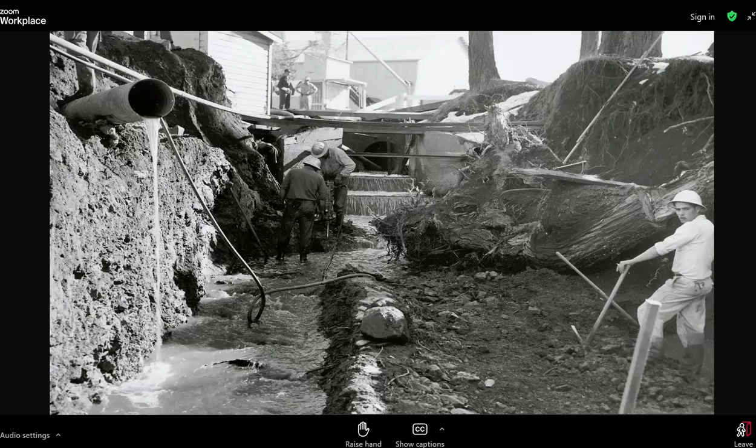Next slide. Okay, so just some previous board action. The district does recognize a multi-year operating budget process, which was adopted by the board back in 2000. And most recently, the board adopted the 2024 mid-cycle operating budget last December. It's the 23-24 mid-cycle, so it was the 24 budget. Previous action says March 2000, when the board adopted the 2-year process.

Yes. Okay, so this morning we'll be looking at our 2024 revised year-end projections. We'll take a look at our revenue and expense projections for 25 and 26. We'll review our debt service coverage, and we will follow up at the end with our 5-year forecast.

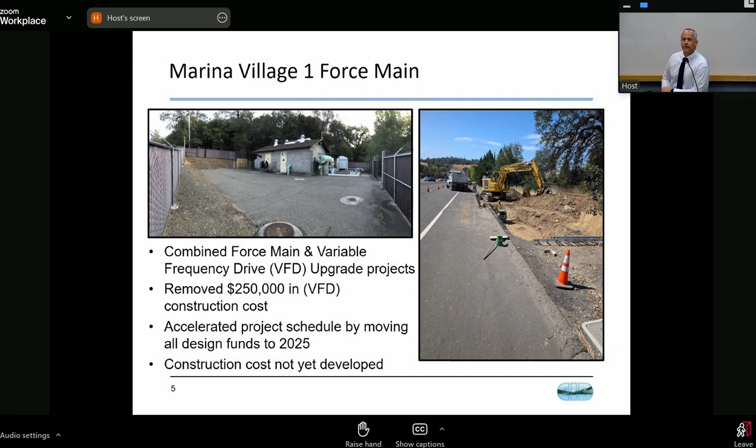The other funds we added were in relation to our Flume 48 replacement project. This is a pretty good success story for the district - we were awarded almost $800,000 for a design contract, so we'll be pursuing that this year. If all things go well and we can capitalize on that, there's up to about 6.6 million estimated for construction funding, which will come through the same funding source through FEMA.

So again, the project is on the books for about 9.6 million. Of that, we believe we can get about 7.4 million in total grant reimbursement from FEMA, which is a real win. That does require additional matching funds for the district, but we think it's well worth it.

I didn't update this.

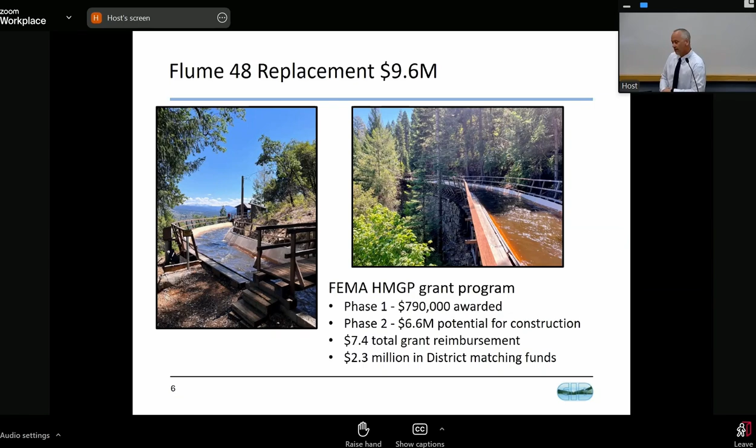Again, just following up on that same mode of success, our Flume 45 Section 3 was already included in the draft CIP, but a similar story where we anticipate about 9.2 million in construction. The percent reimbursement is not quite as high, but we're still anticipating about 6.6 million in total reimbursements from FEMA. It's a separate program, so Flume 45 is under what they call BRIC, Building Resilient Infrastructure and Communities, which is a hazard mitigation grant. So we're again pursuing both arms out of FEMA.

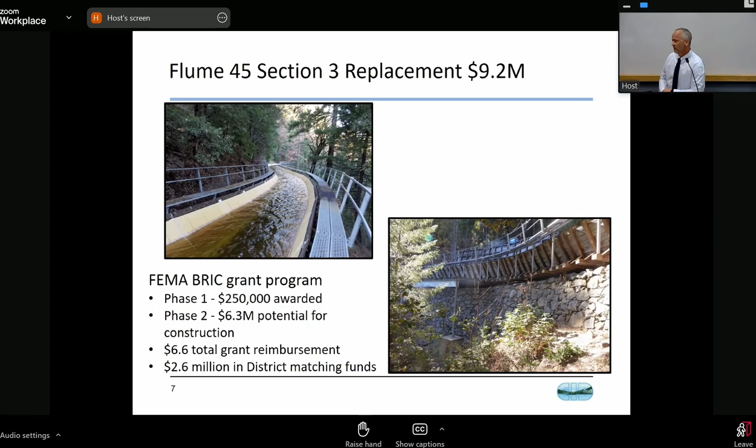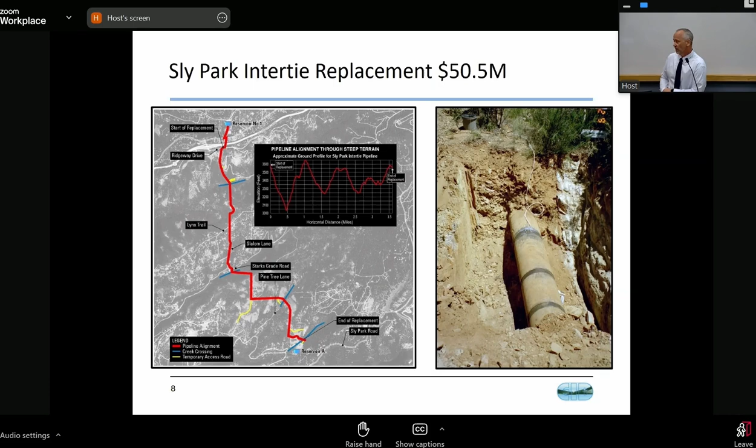Moving on, our Sly Park Intertie is currently under construction. That is on the books for about 50 million, of which 10 million is also supported under grant funds. So we're really looking at about 40 million for that project in the CIP.

Our El Dorado Hills water treatment plant, we just had our kickoff with our design consultant this last week. So we're looking at about 2 years of pretty intensive design on that project, then going to construction in 2027. Total improvements on that project, I put 100 million, I think on the CIP it's 99 million, so rounding up.

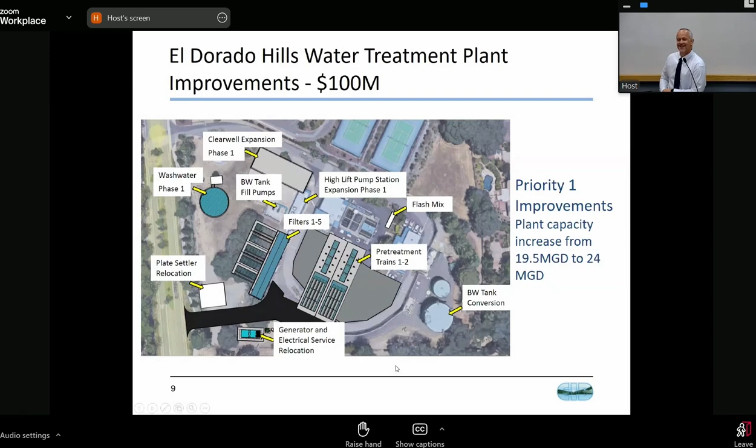Silver Lake Dam, again, is a FERC requirement. We are going to be replacing that late 1800s timber crib dam with a new concrete structure. You can see the original dam in that top left picture, and the replacement under the 60% design in the bottom right.

We have yet to receive a violation from the state water dam safety people, but how close are we to that, do you have any idea? That's probably more of a question for our dam safety engineer, John Kessler, but I don't believe we're in violation at this point. We're making really good progress on the design portion of this project. We anticipate having it go to FERC review this upcoming year, which is also a benefit for us, because some of the grant programs associated with this are contingent on FERC review and approval. So we want to aggressively pursue that approval so that we're both on the regulatory side looking okay, but also opening that grant door a little more as we move forward.

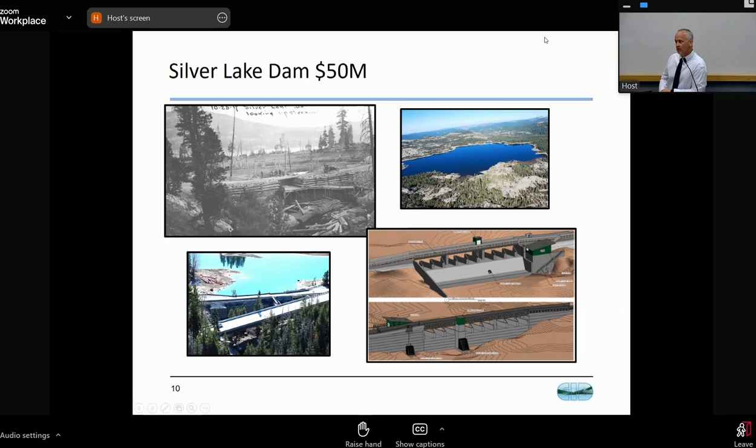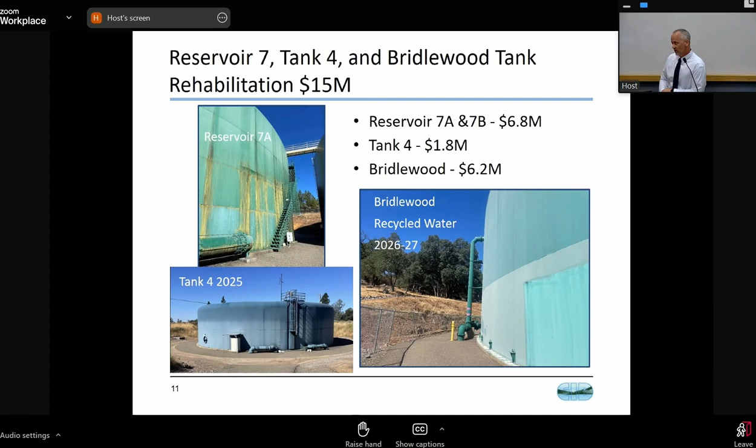Again, we have specific tanks: recoating tank Reservoir 7, that's Reservoir 7 tank A and B, tank 4, and our Bridlewood tank on our recycled water supply. Tank 7A and 7B are scheduled for construction this year, as well as tank 4. Bridlewood is a little more tricky because there's not a redundant tank on that recycled water side, so that's staged between 2 years, in 26 and 27. Continuing with the water storage tanks, it doesn't end with just those 3 tank sites. We have another 9 million budgeted moving forward for the tanks identified there on the right as we continue with our rehabilitation plans.

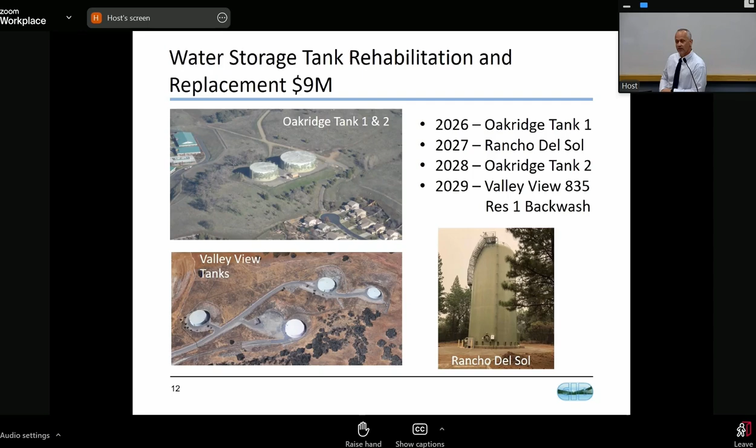Service line replacement, again, I think we were topped out at about 25,000, so we're making headway on this. We've been under a bit of a gun for supply issues. And then unfortunately, just for budgetary constraints, we've reduced that number on the current CIP from about 3 million last year to almost half of that, about 1.55 moving forward.

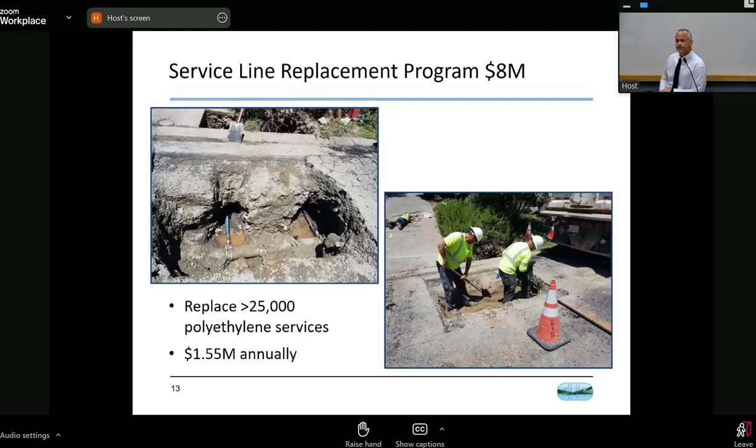And then this last one is Strolling Hills pipeline improvements. We're estimating 6 million for the last 2 miles of that 20-inch force main. I know this came up with some questions on whether we're adding capacity. We're really not, we're coming up to our existing capacity of the Motherlode force main, which is the head of this in Diamond Springs, down in El Dorado.

And then the additional force main upgrades that we have performed for the Motherlode force main. So this will give us an end-to-end project, help reduce some of the emergency storage that we have there in El Dorado, and on occasions where we've also had emergency hauling. So we're hoping to minimize those costs moving forward. One other benefit is that this will be a parallel system, so the existing pipeline will stay in service. It's got residential connections there in Cameron Estates, so we're pulling off that trunk main, which also has the potential to save us some headaches in the future.

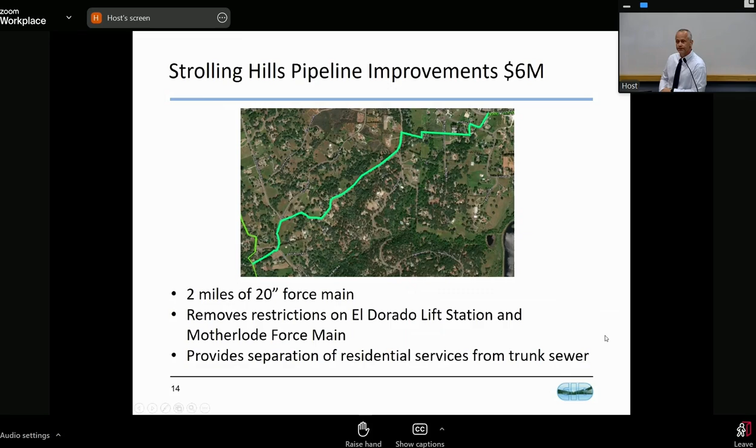Again, just as a roadmap of how we got to here: we had about 67 million in requested program expenditures that were deferred as part of this CIP. Some key deferments include reductions in our service line replacements, deferments in our water storage tank and water line replacements. Our Reservoir 1 water treatment plant improvements have all been extended past the end of the 5-year CIP. I don't believe we have any significant water or wastewater lift station replacements in here either, although on a positive note, we are getting some of our wastewater stations improved by developers as part of their plans, and one of those items is on the agenda later this morning.

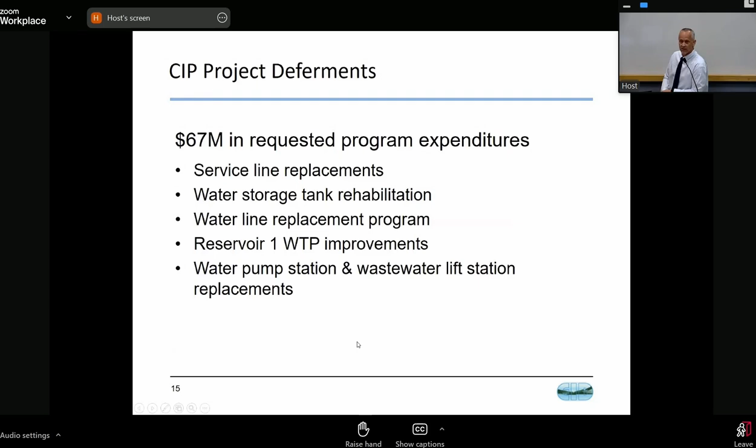So as a comparison, over the last 3 plans we are basically dead even with our 24 to 28 plan with this current adjustment. We typically estimate about 70 to 90% of that. The numbers our Director of Finance presented this morning show 278 that we anticipate really spending, which is our spending goal out of that budget, and that matches the cost of service study the board previously adopted.

Just trending on where we've been and our current state: our historical average since 2008 has been about 41 million a year. The current trend estimates a bump up to right around 56 million, which looks more stable since probably 2020, when we started construction of the Folsom Lake intake. As we really look at improving that critical infrastructure and addressing some of our aging assets, that number has bumped up a little.

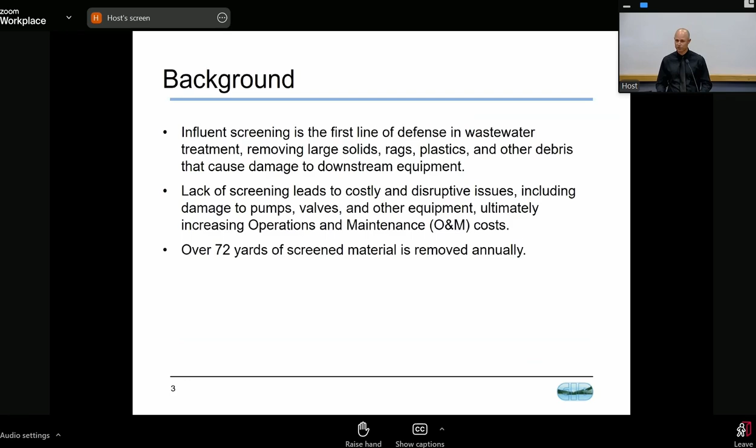To put things into perspective, there's over 72 yards of screen material removed annually. Slide, please.

Yes, sir, that makes up the majority of them. Not that I'm sifting through there, but visually, yes, we can see.

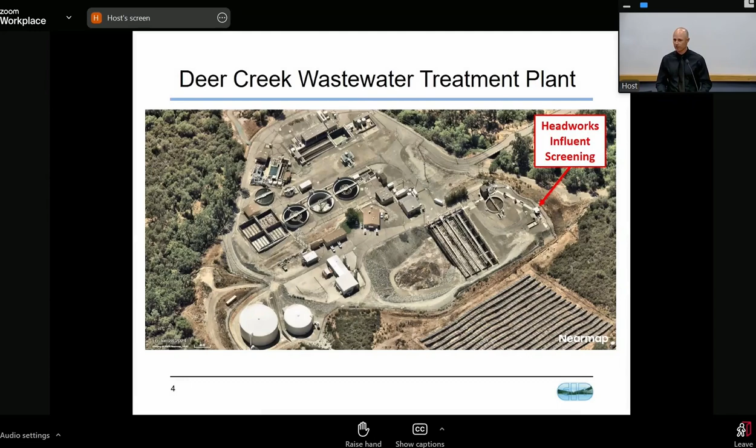Here's a great aerial view of the Deer Creek Wastewater Treatment Plant. On the right-hand side, the north side, you will see where our influent screening, our headworks, is located. So all of the influent flow that enters our collection system, or enters the treatment plant, enters from that location right there.

Next slide. Here's a photo of our existing mechanical bar screen in the background, and in the foreground, you will see that pit with our manual bar screen.

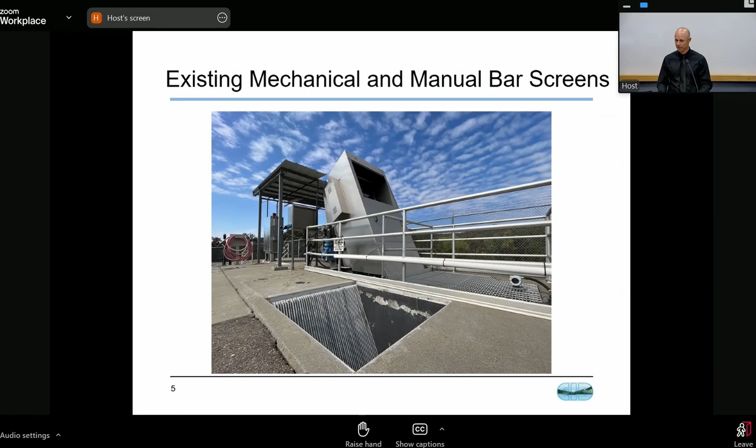Another view of the existing mechanical and manual bar screens. As you can see, the mechanical one is stainless steel. It's built for outdoor weather.

However, in the case of an equipment failure, we would bypass to this pit, this manual bar screen, and I would require an operator stationed there, not full-time. If it's average dry weather flow, we could manage maybe 3-4 times a shift.

If we enter wet weather and had an equipment failure, I would potentially need someone stationed there overnight. This is just a bar screen, and if it packs with debris, it would essentially blind off. If it blinds off, it creates back pressure in the collection system. That chain link fence behind our existing mechanical bar screen is the perimeter gate.

Our physical Deer Creek is just down a little hill. So potentially, if this thing were to blind off and fill up, it could overflow and end up in Deer Creek. So we have some ergonomic safety issues with individuals raking this. Of course, they would be tied off, but there are also compliance issues downstream that could be incurred if we had a large storm.

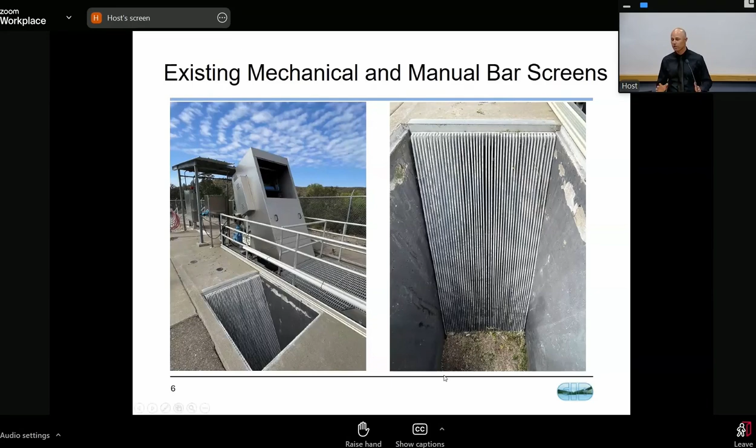This photo provides insight into what the screening bin looks like. These are, as silly as it sounds, high quality screenings—they've been washed, compacted, and are very dry. If an individual was forced to rake the screen, it stresses an already lean crew, but also we'd be putting a sloppy mess into this bin, which would ultimately incur more hauling costs.

And I mentioned silly things that come down the collection system. In that pipe right there, there's a baseball—just to provide some insight into the unusual items that flow down the sanitary sewer collection system.

With these dehydrated, compacted things, could they be used as an energy source, like in a burner? I've heard that other wastewater systems are doing that. I think if someone clever enough wanted to utilize these, they could. However, they are entrained with a lot of plastics, so it would just create more obnoxious fumes.

So could it happen? Potentially, with some forward-thinking. I believe it could, however currently I don't think we're equipped to make it happen, but I'm sure there are things on the horizon. As you mentioned, these do all end up in a landfill—correct, yeah, correct.

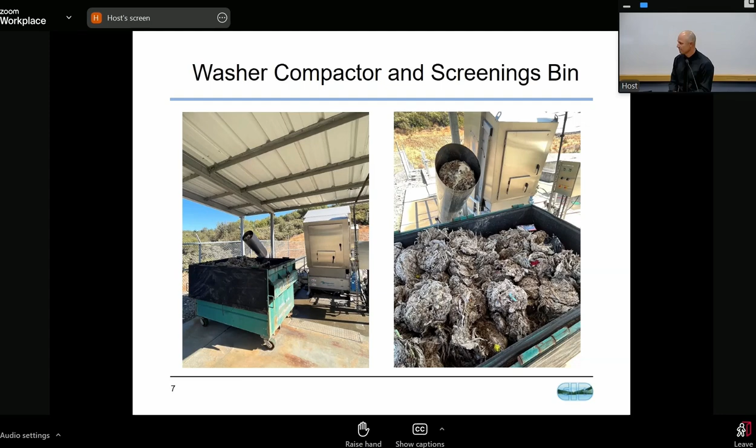Current funding between the mechanical bar screen as well as washer compactor, tax and shipping—the total funding request is $370,628.88.

Three board options. Option 1 is to award a contract to Duperon Corporation in the not-to-exceed amount of $370,628.88 for the purchase of a headworks screen and associated washer compactor, and to authorize funding of $370,628.88 for the Deer Creek wastewater treatment plant, project number 24018.13.

Recommended is option 1. I'll move option 1. Move one with a comment. Yes, sir. Second. Director second. Osborne? So- yeah, okay, all right.

One of the things that has been bothering me for years is why one government agency is paying tax to another. This is $25,000 in tax. Why one government agency taxing another government agency makes no sense. Your governor appreciates it, George. Boy, does he.

All right, we had a motion and a second, and is there any—we need to get this going, we don't want that to fail, so. Yes, sir, appreciate that. Can you pull that out for me? Is there any public comment on this item? Batter up.

Good morning, Honorable Board. I'm John Kessler, representing Engineering, the Hydro Division. The item before you today is to consider a contract amendment to our design services for Silver Lake Dam replacement.

October 2023, the CIP was approved for 2024 to 28. And in January of this year, the board authorized funding of $932,000 plus for our State Division of Safety of Dams application fee. So when we make an application for a new dam, these are the fees that DSOD charges the district for administering and reviewing the project. They actually perform some parallel design work and spend a lot of time with us in the field once we go into construction. So those fees are intended to cover those efforts.

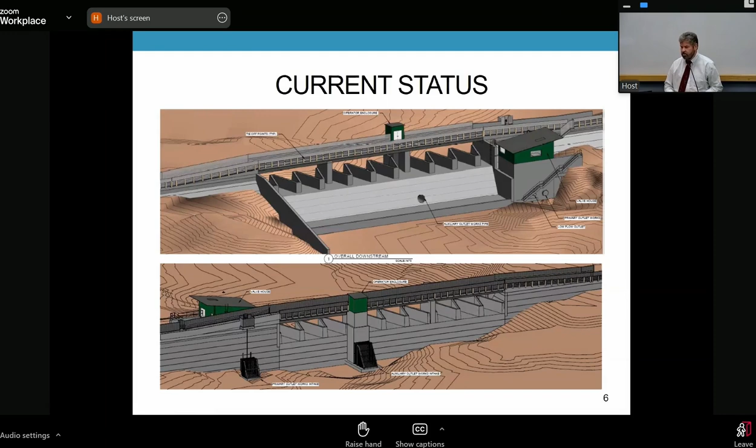One of the primary factors leading to this contract amendment is responding to DSOD's comments at 30% design. They were quite extensive, and we expect they'll be the same with the 60% design package they're about to receive. Some of the comments, for example, got into the foundation prep and requiring a zoned embankment at the abutments.

It's kind of hard to tell here, but the left image is a plan view, and the lake would be to your right and downstream to your left. Can you let me navigate again? So what it shows is that you have a soil contact and you need a filter drain, much like we did with Forebay. There's a sand layer and a gravel filter - the sand layer prevents soil particles from migrating, and the gravel layer is the main drainage feature that exits the water from that embankment.

We're not expecting much water there because we're going to have a dam seated on very highly competent bedrock, which is what we found from our subsurface exploration. We also have this cutoff wall, which on the left photo is that wall that goes up and then to the right. That's going to extend about 200 feet, and we expect that it'll also go down to contact with bedrock. We feel like this is somewhat of a redundant feature, but it's how we had to respond to DSOD to satisfy them. There is potential, but we think it's pretty low, and we feel we're going to very well satisfy that concern with this addition. Next, please.

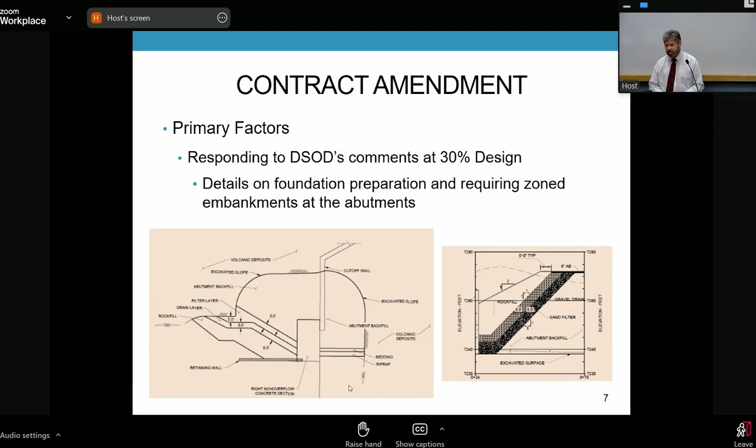Another factor is the low-level outlet building. You can see a side view on the left image, the intake structure and a gated operating platform up on top by the crest of the dam. In the side view there's basically the 48-inch outlet. What you can't see, but can appreciate on the right photo, is that 48-inch bifurcates, where the 48 continues to the near right, and a 24 is the other leg of that bifurcation. Our primary in-stream flows are really low, so this gives us really accurate control of those low-level flows. The 48-inch gives us more of an intermediate range of flow release control. And then, remember, we have that auxiliary outlet, which gives us the bigger event flow release if we need it, and of course spill capability.

So in fitting all this into the building, we found we needed a bigger building, and it wasn't something that could be satisfied with a prefab building. We had to construct it in place. So we're planning to have a concrete batch plant so we can easily have the materials to construct this building in full height, formed and poured on site.

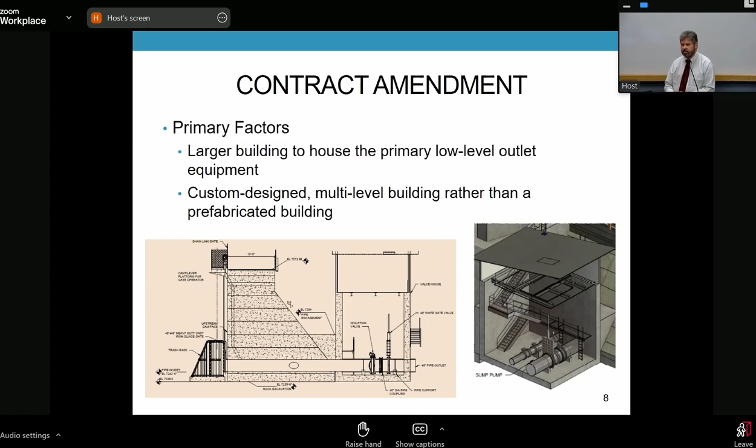With regard to the auxiliary outlet, this had to fit within the spillway approach, so we had to enclose it within a wet well and also provide housing for the operators for the two outlet gates. If you look at the photo on the left, you see what looks like two operators - one is an isolation gate, the other is the regulating gate. Again, this is a 60-inch outlet. This wet well is an additional feature that wasn't entirely foreseen at the original time of the project's plan.

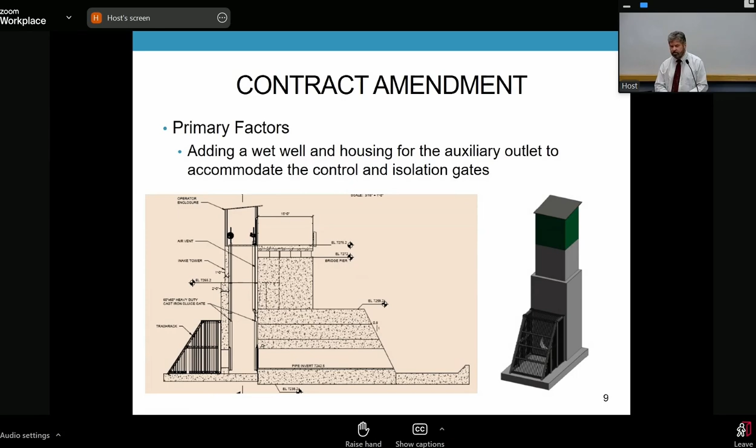The spillway design has been modified from a stair step to a sloping chute, and we believe this is going to lead to lower long-term maintenance costs. The concern with the stair step, or the purpose of that early design, was that we needed it for energy dissipation, to slow the water down as it enters the riverbed. That's not the case, through modeling done by our designer. The stair step effect is something we felt could be a greater public safety attraction, but also, in terms of maintenance, it's an issue where water doesn't readily drain off, and freeze-thaw action can lead to concrete spalling and more year-to-year maintenance work. The sloping face is going to give us readily removal of water, so ice doesn't have a chance to build and cause that deterioration.

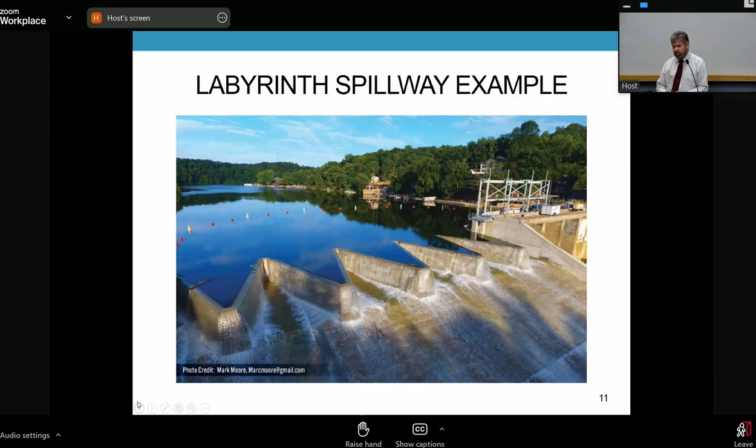This is what another dam's labyrinth looks like when it's flowing at a limited flow, but as you can see, Director Day, it's flowing, just a pour-over arrangement, and there's no need for anyone to get out there and do anything, except when debris might build up and you need to remove a restriction. The bridge built into our design will allow us to get equipment on the dam and break up ice if that's an issue, or remove timber debris should that occur. We'll also have a log boom upstream, which will help sweep a lot of that off the lake as well.

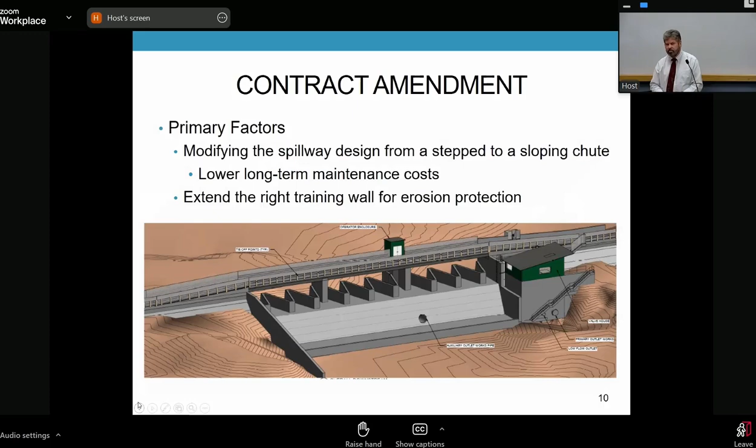Another factor is - did you go back or forward? Okay, yeah, this is right.

Thank you. We've also added some inspection and maintenance access features. You can see the stairway on the lower right to get down to the river level in the base of the spillway. There's also a ladder, which is more difficult to see, that allows us to get to the upper platform level of the spillway, the flat section that goes up and over the wall just by the far left corner of the outlet building roof.

You can barely see that going over the wall. We've also thought hard about the public security measures we need. We're looking at guardrails and handrails on both sides of the bridge and the dam crest, as well as fencing on the downstream side where there's a greater fall hazard, and how we're going to monitor with security cameras, which will help our operations with watching for changing conditions.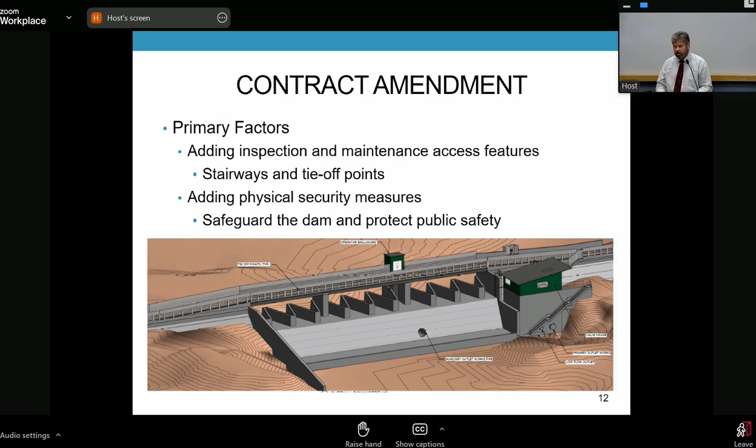Some other primary factors: we anticipate additional comments from DSOD, the Federal Energy Regulatory Commission, and Caltrans that could influence our design efforts. We're providing for six additional months of project coordination during the design phase, developing an environmental permitting strategy and schedule, and supporting the district in preparation of new grant applications.

We did receive GEI support for one application to the U.S. Department of Energy's 2023 solicitation for maintaining and enhancing hydroelectricity incentives. That application was denied because we had not yet received FERC approval. We had hoped that FERC's engagement in our project, showing their support for our direction and our completion timeline, would satisfy the grant requirements, but it did not. This is a grant program that sometimes repeats in subsequent years, so we're monitoring it. Mike Haggerty, our grant specialist, is helping with that effort, and we're looking for another opportunity, a revival of this grant program.

As you saw on the agenda earlier today, the consent item, we're preparing a grant application to the Department of Water Resources for this very same project.

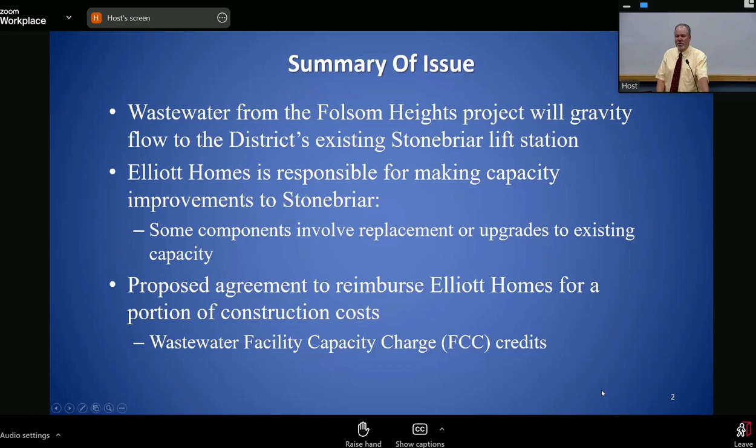Summary of the issue: wastewater flows from the Folsom Heights project will gravity flow to the district's existing Stonebriar Lift Station. The developer, Elliott Homes, is responsible for making capacity improvements to Stonebriar. Those improvements will also benefit existing customers by replacing existing equipment. We're proposing to have an agreement with Elliott Homes to reimburse them for a portion of their cost using FCC credits.

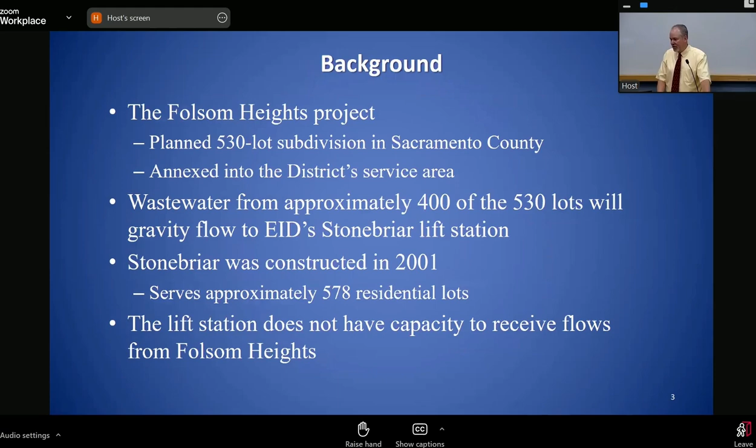Some background: as you recall, the Folsom Heights project is a planned community of about 530 lots in Sacramento County that was annexed into our service area back in the late 70s. Wastewater from about 400 of the 530 lots will gravity flow to the existing Stonebriar Lift Station. Stonebriar Lift Station was constructed back in 2001 and currently serves about 578 residential lots. But the lift station does not have capacity to serve Folsom Heights, so they are responsible to make, at their cost, capacity improvements.

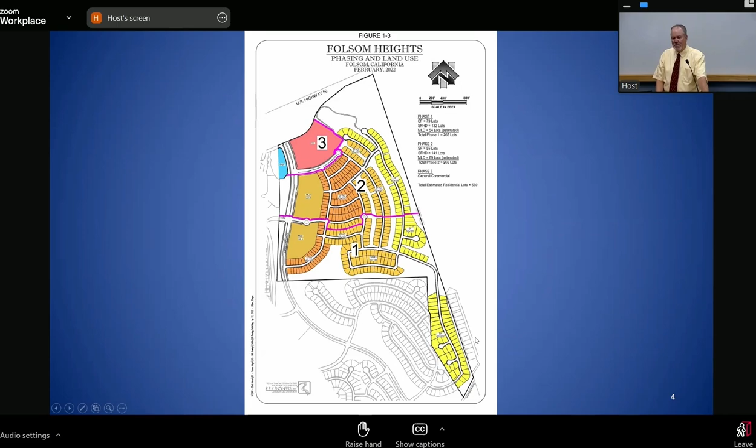Here's an exhibit you've seen before of Folsom Heights. The color coding shows different types of housing. Highway 50 is up at the top, above the number 3. The 3 numbers are the phasing plans, with phase 1 hoping to start this year. Down in the lower right-hand corner is White Rock Road, and Stonebriar Lift Station is located to the right in El Dorado County, about where the flag starts.

Moving back to background: Stonebriar is 23 years old. At some point it will need condition-based improvements, which aren't currently in our CIP or any future planned CIP. Capacity improvements will be constructed by Elliott Homes, which include some replacement of existing equipment nearing the end of its useful life, and those costs should be paid for by existing ratepayers. We will benefit from this project by replacing equipment that is reaching the end of its life. Again, we propose to reimburse Elliott for a portion of their cost using wastewater FCC credits.

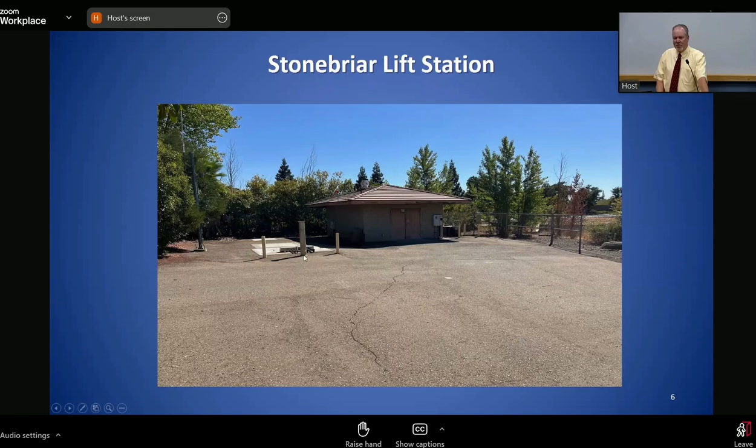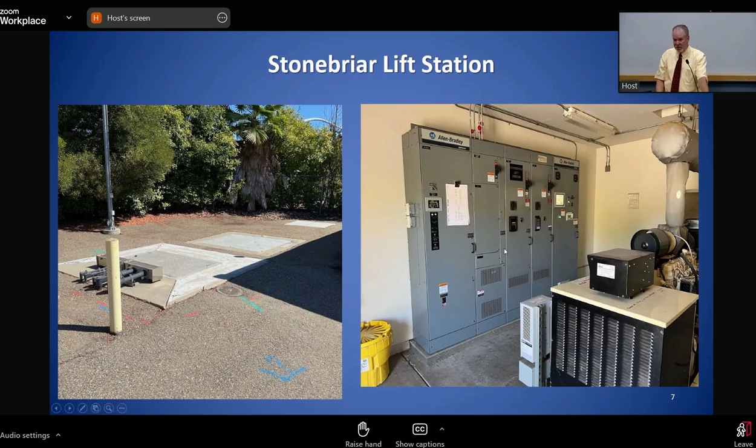Elliott, the developer, has retained T&S Construction to build the Stonebriar Lift Station project that we're working on with Elliott. The improvements include new electrical service, a new generator, new electrical gear, a new wet well, new manholes, new pumps, piping, paving, and other items. The total cost of construction that they've awarded to T&S is $4.31 million.

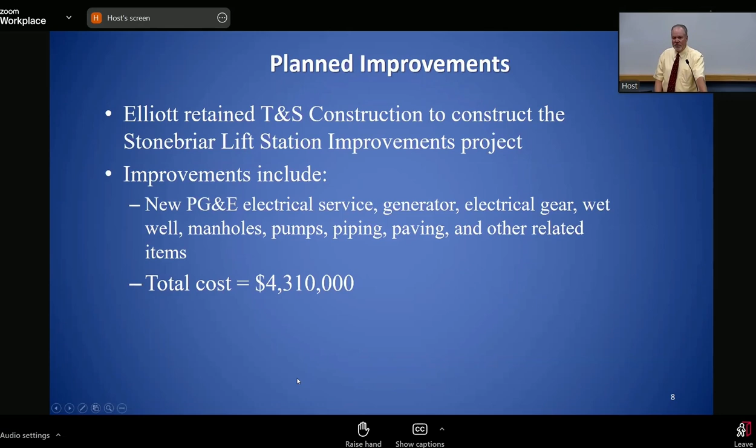Our old lift station designs had check valves and valving in a vault, which pose an access hazard for confined space and ergonomic issues getting into that vault. So as part of this project, as with all new lift stations we do, that piping will be above ground.

It also allows us in the future to divert flows to the existing wet well, which we convert to emergency storage. So in the event of a need to work in the new wet well or replace pumps, we can divert flows to the old wet well, which would be emergency storage, going there by gravity, and we can pump from that.

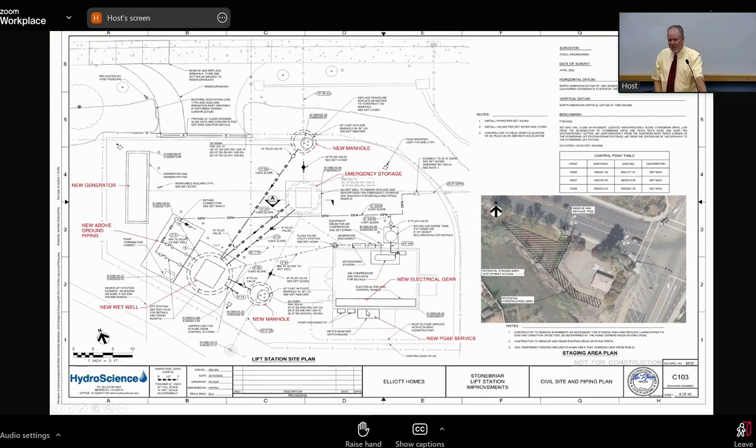Again, giving us access to easier maintenance in the future. Within the existing electrical building, the generator will be removed, a temporary generator installed on site, and new panels put in to replace the existing ones. And in the lower right-hand corner, as mentioned, a new PG&E service will be brought into the site to power the higher horsepower pumps.

The district will benefit by replacing aging equipment and correcting some existing deficiencies that are part of the overall lift station project constructed by Elliott. The existing PG&E service is actually undersized for the existing pumps. It's working fine, but they will need to bring a new PG&E service to the site, and we acknowledge we're going to benefit from that. We propose to reimburse them 10% of their costs associated with that line item in their bid schedule.

The existing generator can only power one pump at a time. This is very problematic during a storm event, when you need both pumps going. Right now, the existing generator can only power one pump during a backup condition, so we're proposing to reimburse them 25% of their cost to provide a new generator at this site.

They'll install a new large wet well with a new vault lid, which will have fall protection. That's a big safety improvement for our staff.

They'll install a new dedicated Vactor tube in the new wet well. A Vactor tube is used by our big suction equipment during maintenance or emergency operations. Having it dedicated in the wet well means our crews won't have to take the time to assemble 5-foot sticks of tubing to get into the wet well. Equally important, it also prevents ergonomic issues, since those tubes are heavy, especially as you start stacking them up. So with a dedicated Vactor tube in the wet well, we'll eliminate that issue.

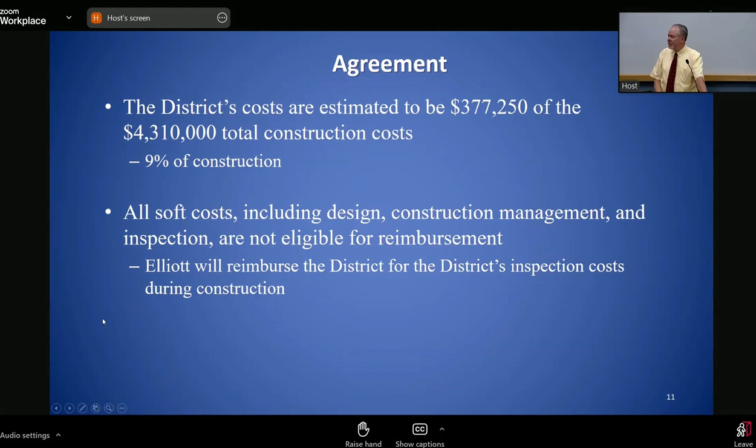No funding is required today. As mentioned, Elliott, the developer, will be reimbursed in the form of FCC credits for the portions benefiting existing customers. There are approximately 400 new sewer connections that will hopefully be built out and connected to our system. Based on the recently board-adopted FCCs, that has a value of about $5.5 million in FCCs. To pay for that $377,000, approximately 28 of those 400 FCCs will be paid for by credits. So no funding is required today, just offsetting some FCCs towards the credits.

Board options: Option 1, approve an agreement for the completion of public facility improvements for the Stonebriar Lift Station Improvement Project in the estimated amount of $377,250, EID project number 3992 DEV. Option 2, take other action.

Any questions? Board recommend Option 1? Lori? Yes, I'm kind of trying to figure out these numbers because it looks like a shell game to me—not that I doubt it's a good one. I'm just trying to figure out, when you say the FCC value is 5.5, but the value of doing the upgrades is 4 point something, right? Well, yeah, that's their cost to do the improvements. They're building improvements, so most or all new development pays their share for their growth, since the existing lift station does not have capacity to serve any of their needs. I understand that—that isn't the question I asked.